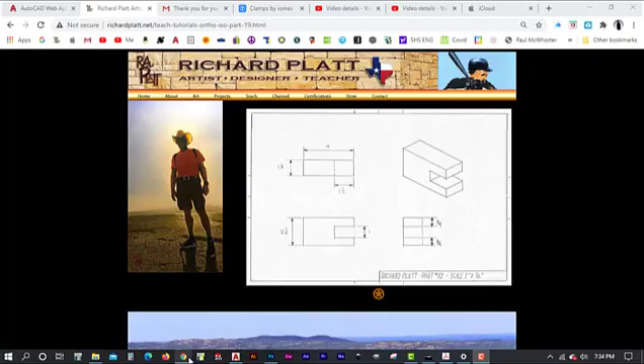Everything's drawn at basically a 30-degree angle, so it's actually pretty easy to do, mainly because we're using AutoCAD, and secondly because we went ahead and changed how we track in our orthographic. So let's go look at that again.

So we come up here, we select on polar tracking. On our polar tracking, we have set it to 30, 60, 90, and 120. That makes life a lot easier. Okay, so we got that done.

Next thing we need to do is go ahead and come up here and change which layer we're working on. We're going to select on that view there. We're going to unlock that one. We're going to go ahead and lock this one ahead of us so we don't draw anything on the ISO layer. And we'll go ahead and accept it.

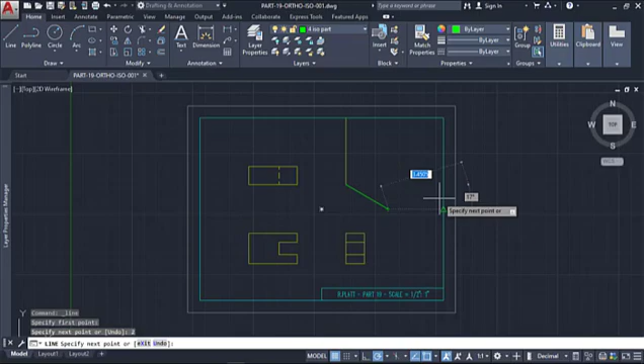Now I'm going to go place a line, and I'm going to start here. Because I got my polar tracking set with 30 degrees, all I got to do is key in 2 and come up here and key in 0.75, because again I'm going opposite. And I can come up here and go to 1.25, put that in, come down here again to 0.75, hit enter, and then come down to here and snap off right there.

Okay, that's pretty good. So now what we're going to do is just go ahead and use our copy command, this guy right here, and we're going to select that one to copy. Actually, let's see if we can get 2 at a time. I hit copy, it says select objects. I'm just going to get them both. Okay, hit spacebar, come down here and grab this one, and we'll find that little green snap box there, and we'll do that. Okay, that's good for now. We'll come back to this in a moment.

We'll come back to this in a moment.

Well, dinner was really good, so glad you're patient with me on that.

Let's finish drawing this ISO. Okay, let's go up here and get the copy command, and we're going to select that guy right there. We're going to select the copy command. All right, I'll go ahead and accept that.

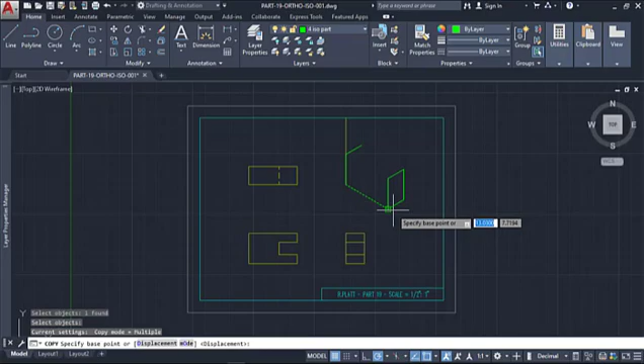I'm going to start over, must have done something wrong here. Select object, okay, I did that. Grab the start point, okay, we get it right there. Come over here to this one, get that one right there as well. All right, that looks pretty good.

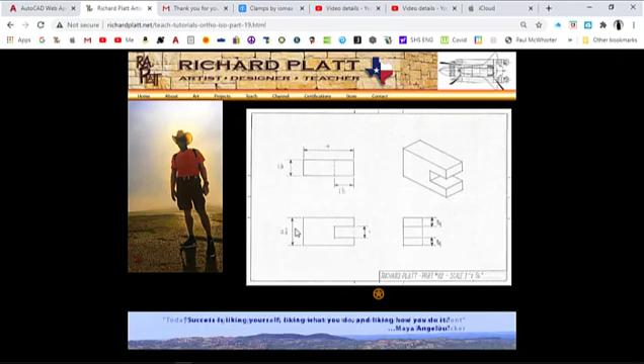What we want to do now is go back to the ISO in the drawing. We know that it's 0.75 going that way, so let's figure that out. So what we're going to do is come back to the AutoCAD, roll up on this, pan down, and we're going to do an offset.

That's easier. Hit offset, and we'll say 0.75, enter. So we'll grab this guy here, come over 0.75. All right, looks good. Now what we need to do is offset 0.375. So we're going to go 0.375, and we'll select this guy here, come up, and come down here with this one and select him.

All right, now what I'm going to do is do an extend, which is hidden behind the trim, and I'm going to select these objects here, enter, click on that, take it up there. I'll come up here, escape, go back to trim, select these objects here, and trim him out. Okay, he's gone.

All right, let's come up here and escape out of that. Let's do the trim again, and we're going to go ahead and clean all this up. Hit accept that, and we're going to trim him, trim him, trim him, and hit escape, grab him, and just hit delete. All right, let's go back to the copy command, this one right here, and we're going to select this object here, hit enter.

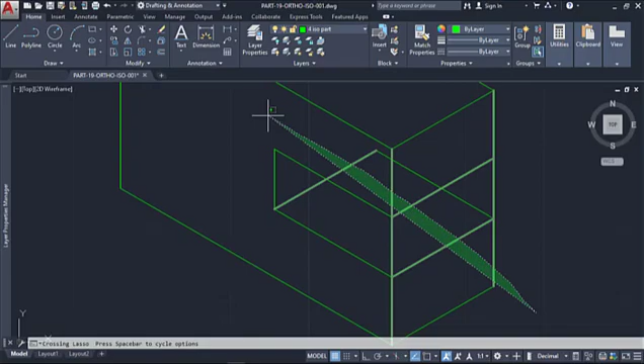Okay, now let's roll up on this a little bit. We got a lot to clean up here, so let's get that going. So I'm going to select all this, and get that one as well, and I think that's good enough.

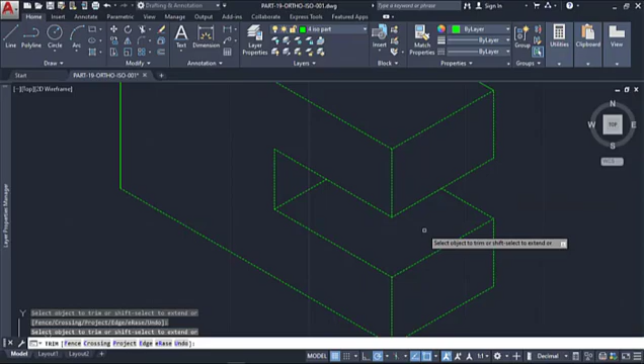We're going to hit trim. Actually, let's do this again. Escape. We'll start here, scroll over to like right there, get all of those, hit our trim command, get rid of that one, this one, here, and hit escape. That looks like we got it all.

Okay, we got one last thing to get rid of, and that's that vertical anchor line we left over from the orthographic. So first thing first, save the file, come up to our pull-down here, let's go to ISO parts, unlock ISO parts, let's hit our erase command, get rid of that, erase, and it's gone.

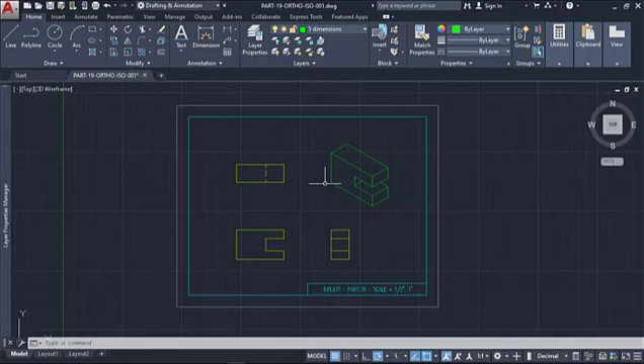Excellent. So hit escape there, and let's go back up here, and we'll lock that one and lock that one, and come down here and get ready for dimensioning. Okay, that's good. We've got our isometric drawn, we've got our top, front, right drawn, and all that's really left to do is dimension this guy up. All right, let's go on to the next video.